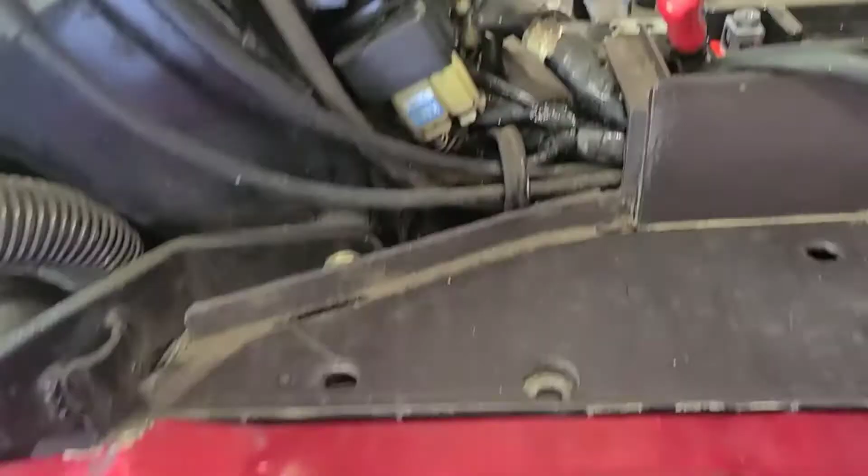I just want you to be safe, folks, because now I'm looking at this wiring and more good news there, I guess. As I gaze, I can already tell there's tape that doesn't belong in there. It's falling apart. We'll look at that in a minute because I can see that's going to be a headache.

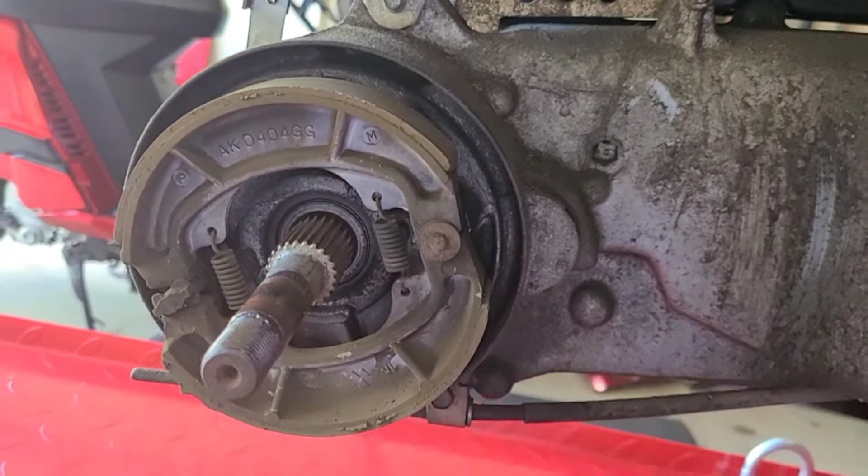But we have the wheel off and we're going to address the brakes next, and also clean under here as well. We got some brand new brakes that we're going to put on. I also had to look at that exhaust gasket - I got to order that as well. And then go back to that mess of wiring.

But these are the brakes I ordered - great sets, original sets, that also come with the springs. So they are OEM, and I like to put back on the bike what was originally on the bike if I can. Once we take a look at these old brakes, you can already see there's brake dust all over them.

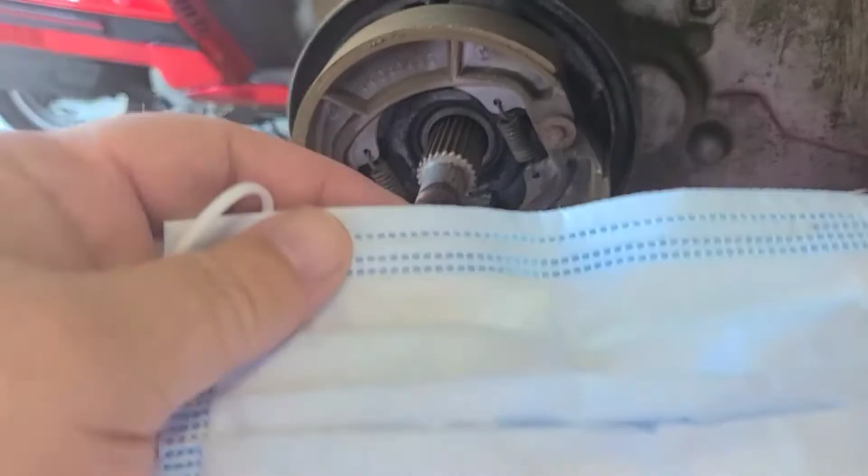You really don't want to disturb any of that brake dust because it can be very harmful to breathe. So make sure the first thing you do is put on some kind of mask - something to protect yourself just until you get all this brake dust under control. Something like this is fine. Just make sure you wear something.

And here you go - got the old set off very simply. And now I will go ahead and clean under here. There's all different kinds of products that you can use.

I just buy the same old stuff - either Brakleen or this Super Tech brake parts cleaner. Spraying it down, just getting rid of all the old nastiness that's in there. Just make sure you put something underneath. I spray it down, clean it up, no worries.

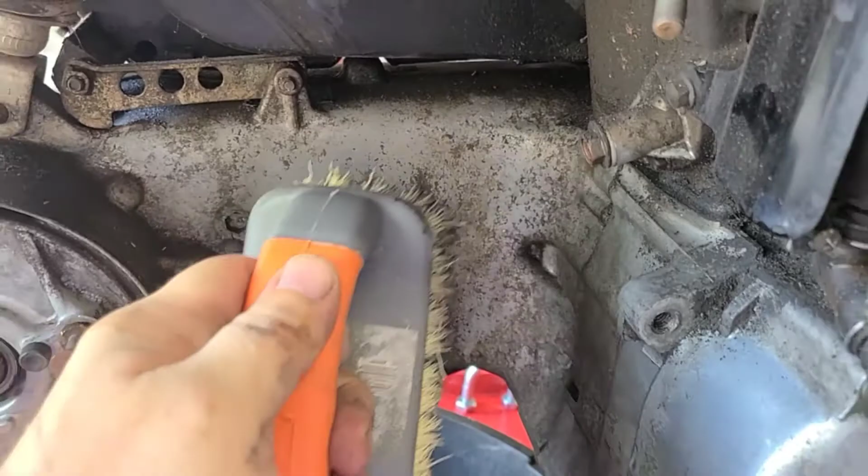Next thing we'll do is start beautifying, trying to clean up all this old muck that's been on the bike for 30 years. It does take a bit of elbow grease in order to get it off.

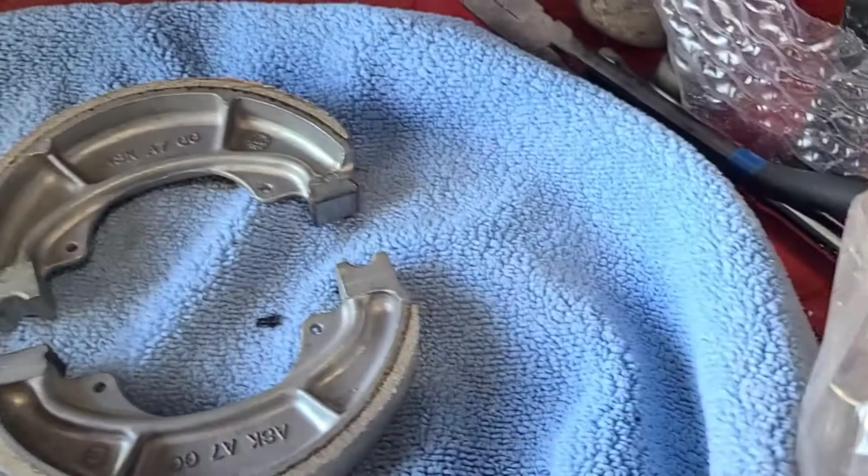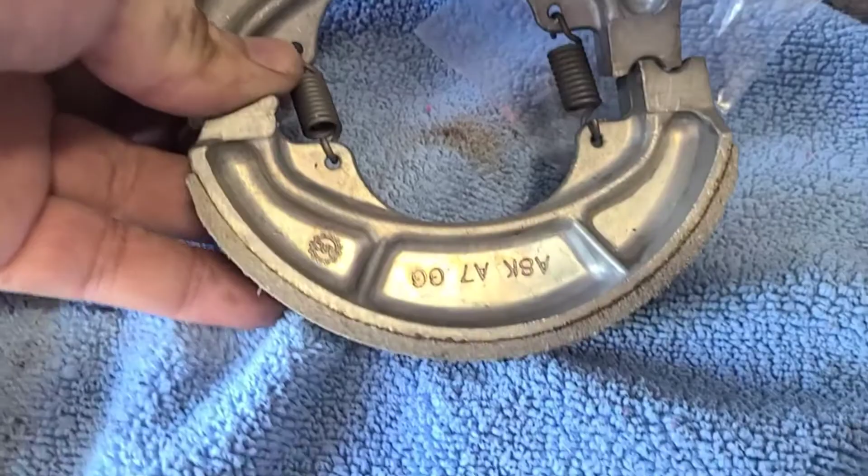Keeping the old pads and springs together, I'll assemble the new ones. Here are the springs, which are identical to the old springs. You can see right away that the new pads are almost twice as thick as the old ones. This is going to help definitely with stopping power, which is much needed. When you go to install the new brakes, put the springs on first - it makes a much easier time of replacing them if they're put together ahead of time.

And there you go, they're very simple to install. The front brakes, same situation, but this time the pads aren't as bad, probably because the front brakes didn't get used as much. But I have an OEM set, and if you can, try to replace the front and back brakes at the same time. It's just so that you know in the future that when you go to replace them again, they're the same age. Otherwise, we'll go ahead and tackle these the same way as we did the back.

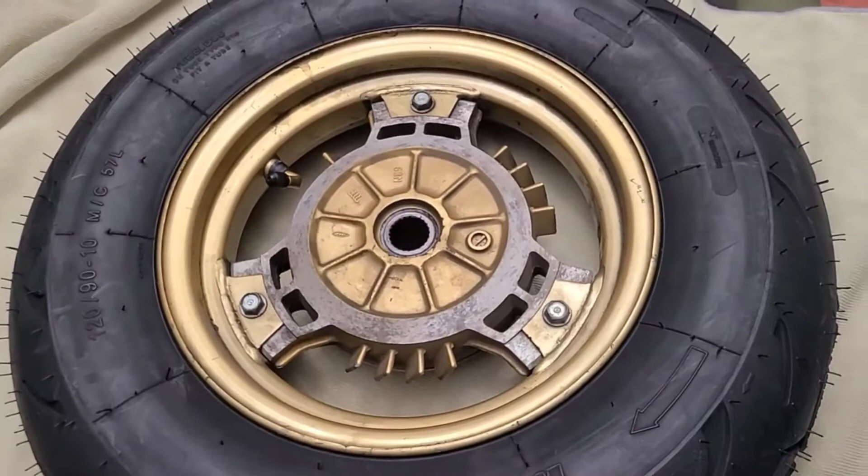Well, I just returned from Honda and they put the tires on for me. This is one of the few things I will not do anymore - I much rather have them do it. They can take them off and on in a very short amount of time. Me using spoons and messing up my arm again, no, not happening. I had an injury on my left arm and I really don't want to aggravate it by putting on some 10-inch tires. It's not exactly easy to do - the smaller the rim, the harder it is. I could get it done, and I have in the past, but I'll let Honda take the credit this time.

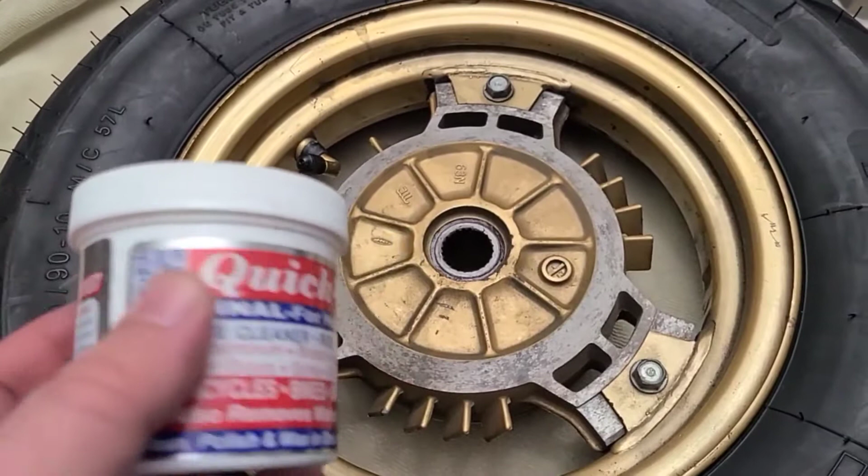But we're going to go ahead and clean the rim up next. I'm going to get out my Quick-Glo cleaner - this stuff works pretty good at removing some of the old rust if I find any. I'll also use some of my orange cleaner, that works really good. There's a little bit of rust, but not much. I think overall these will clean up okay. I guess we'll see - well, what do you think?

I think they came out pretty nice. You got to remember that every little spot is not going to come off. These are 35 years old and the gold overall looks pretty good - they could have been much worse than what they are. Once you put them on, unless you're sitting and staring at them from 5 inches away, they look pretty good.

After about a good 35 minutes of elbow grease trying to get all the old grime off, I think it paid off because, in my opinion, they look gorgeous.

Our next focus is going to be these electrical connections right here in the front of the bike. A lot of the tape is falling off, it's filthy under here. There's some tape that I'm not exactly sure what it's covering, and a lot of it's just moving around - this is just a mess. So I'll go through each connection, clean it up, make sure everything is the way it's supposed to be. Let's see what we find.

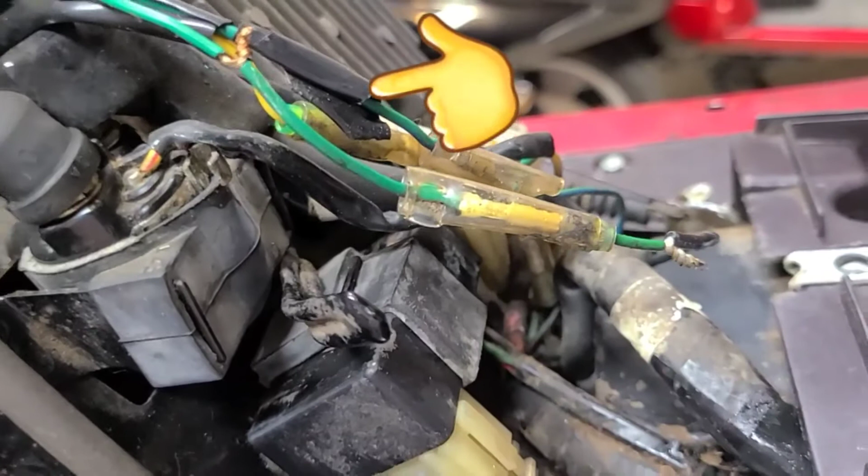And this was exactly what I was hoping I was not going to find - more of these stupid connections. Except these are right next to other ones. Look at the one right to its left, hardly any tape on it. I'm sure that's the same way. This guy was a fool - you shouldn't do this, and if you are going to do it, then you're putting your own life in danger. Each one of these I'll go through and make sure they're all right.

This is one of the reasons why when you ride something for 35 years you'll find anything. There you go, finding stupid stuff like this.

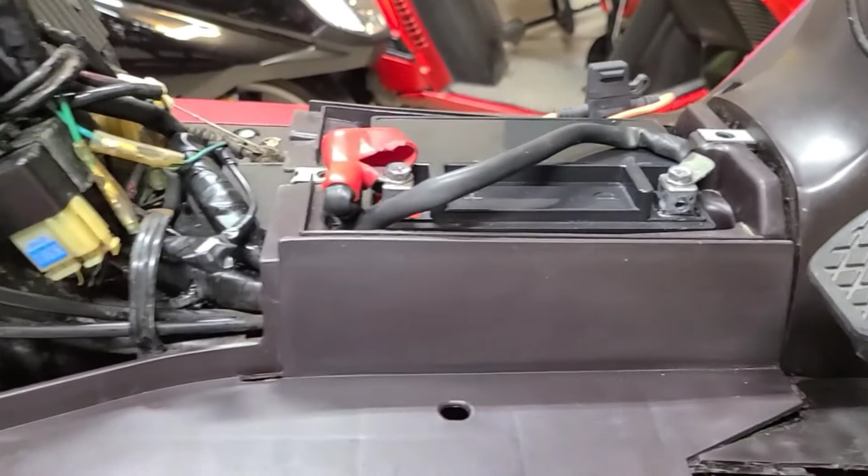Anyways, I'll go ahead and fix all this back to the way it needs to be. After about 45 minutes, I found 3 more that were just like that first set, where they were twisted and covered with some electrical tape, and that was falling off those as well. So I went ahead and fixed all 4. I also went through all of the other connections and made sure they were good. I replaced all the old electrical tape with some new tape, and I also used contact cleaner on each connection just to make sure it was in good shape. And now I think I can ride without worry.

So if you buy one of these bikes, here's something that you definitely should address. At least look it over.

All right, let's switch gears to the other side. We have this airbox/collection type system. It's connected to the carb and wraps around. Very unique, not like any other bike I have. But we'll take the whole thing off and inspect everything with it.

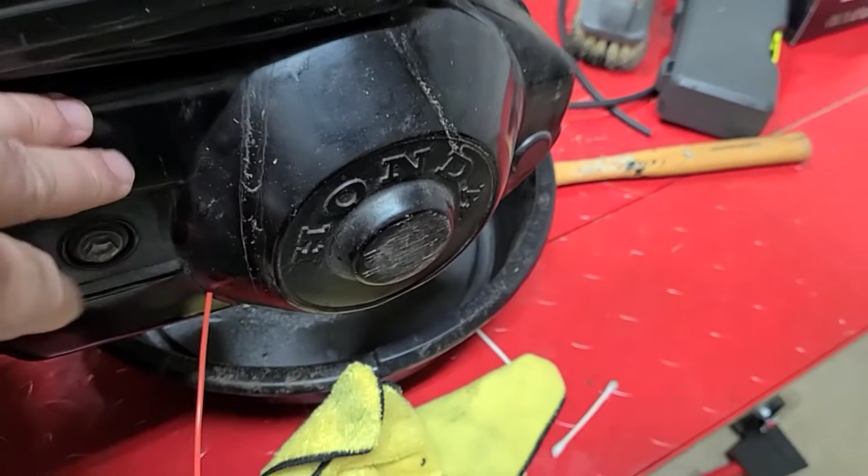We'll also take the front cover off the transmission and take a look inside there. Got some nice rash there. I'll probably end up repainting that flat black just like I did Ruby. I like the look of it, same black that I used on the exhaust.

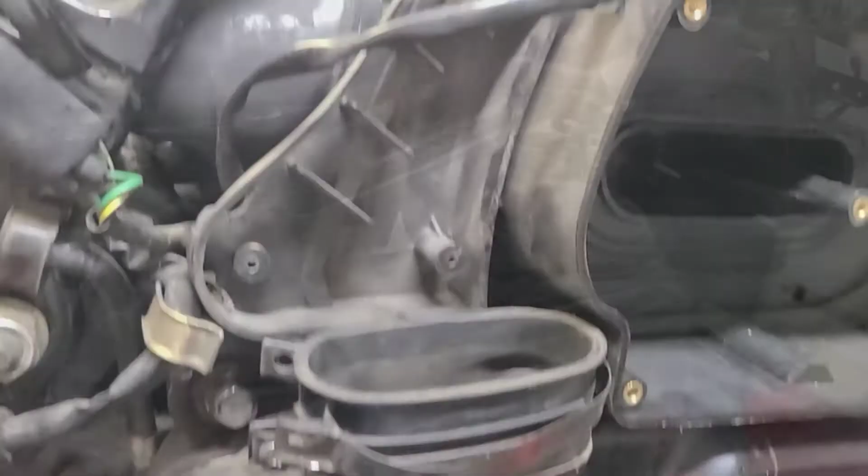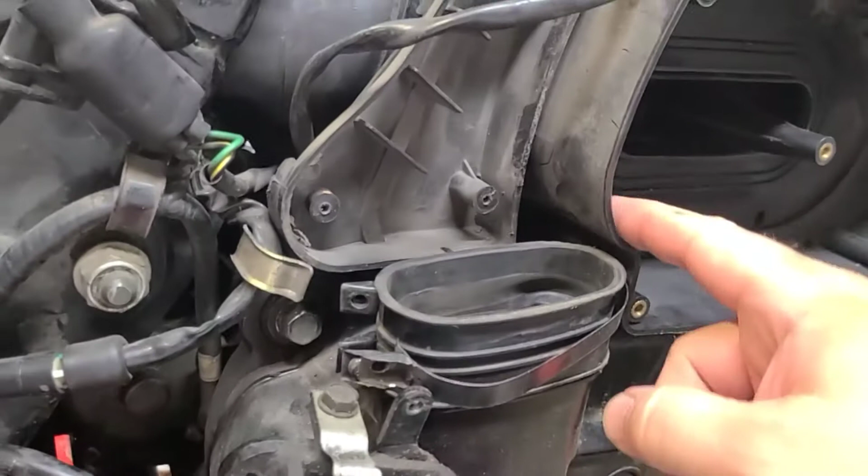But let's go ahead and get started. The first part I took off is called a cover belt case element. I didn't name the part, folks, Honda did. But it has 3 screws and a little band that holds it on, and there's a couple more bolts that I removed as well. You can see one right there and the other one inside.

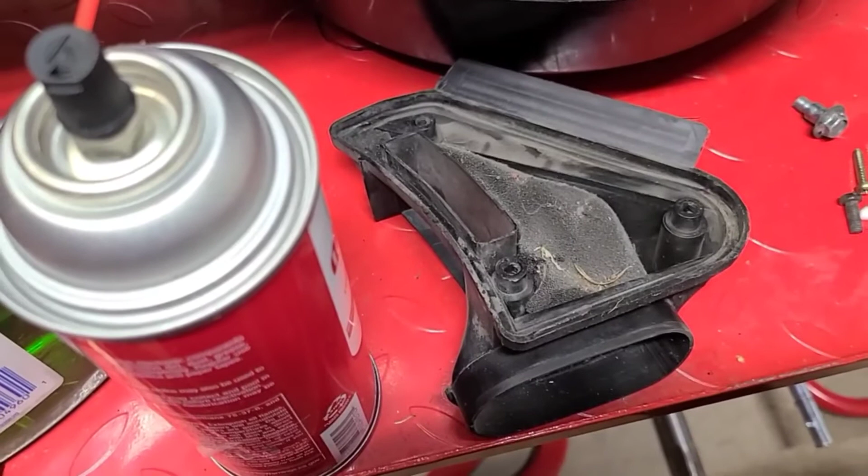And you know, you have the air filter, but I wonder if anybody is going to be alarmed that they didn't know about this. There's an element on the inside of this that's got to be cleaned, and this has obviously never been cleaned. So you take it off, clean it, then add some oil to it and reinstall it.

Well, the beginning, or the front of it, just came off in my hand. This collection box or whatever this thing is called, I'm not sure of the actual name, goes and connects right there to the front of the carb. And from there it goes all the way to the side into the air filter. So it's all connected and starts there. And it wasn't even on tight, it just fell right off. A lot of good the rest of the stuff is going to do if the beginning part's not connected.

Just another aggravation. But you know, that K&N carb that's there, that's not the original carb. Not sure what is wrong with the original, I found it in a box. We might rebuild that and put it back in. Who knows, we'll see what happens with this one. But the beginning is out, let's continue to pull the rest of this out of here.

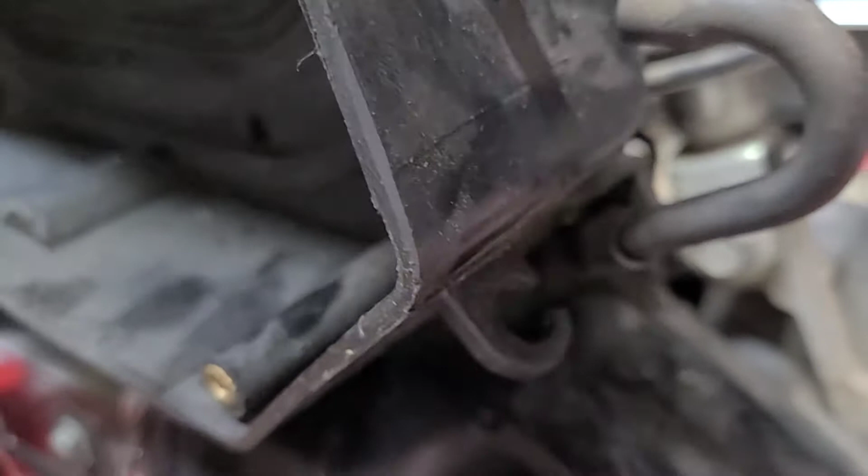And I'm trying to point out here some of the things that I encountered. This particular connection, don't forget about it, otherwise it didn't want to come off. I looked over that parts fiche and found all these different things. For this one I used some curved needle nose pliers and was able to get that off. But be careful, you didn't want to pull too hard on that and have it come off the other side. And there you go, probably the first time this has ever been off the bike.

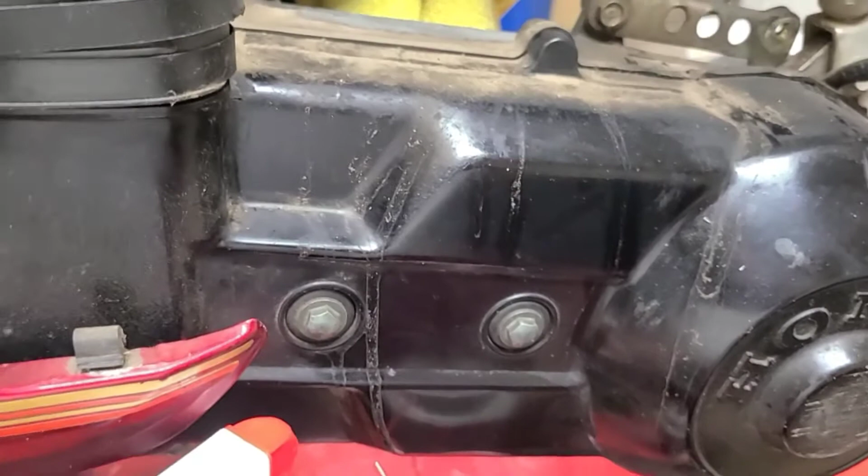I wouldn't doubt it, and we've got some cleaning to do. We've got our spark plug visible, of course that's going to be coming up soon. And we'll look everything over under here just so I take care of it now before I put that box back on.

Now you can see this is as far as I could wipe. Before, all this was on top here and I couldn't get to any of these areas. I tried to get it cleaned up, but now it'll be much easier for me to get a rag around in here.

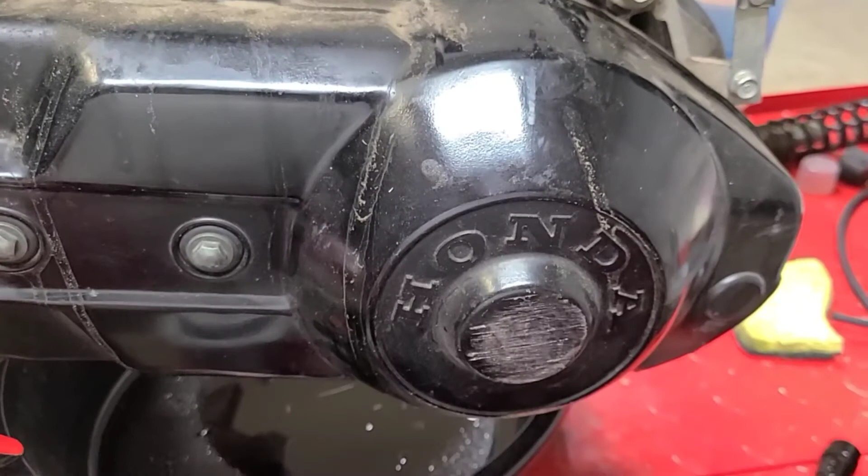We're going to take care of that spark plug next and clean around that. Let's hope it's at least the right plug. I've had some experiences in the past where I find the wrong part number plug. And we're also going to take a look at the shock. I've got to take this side off, which has not been removed, and get those all put in place. That's all coming up soon.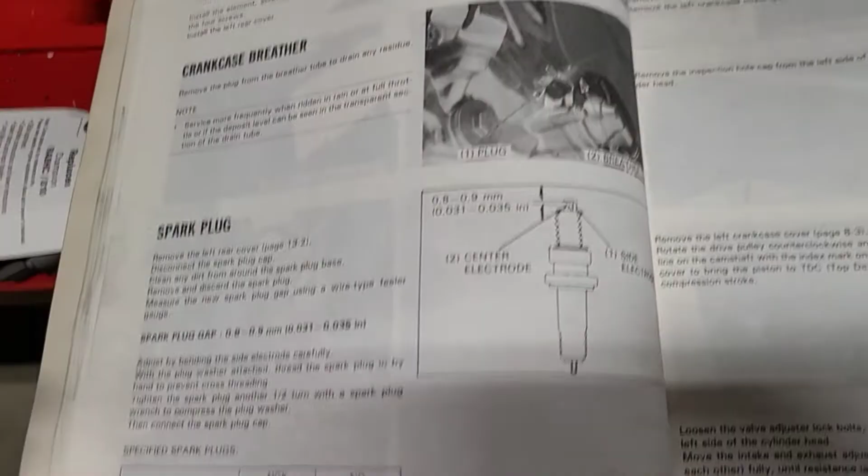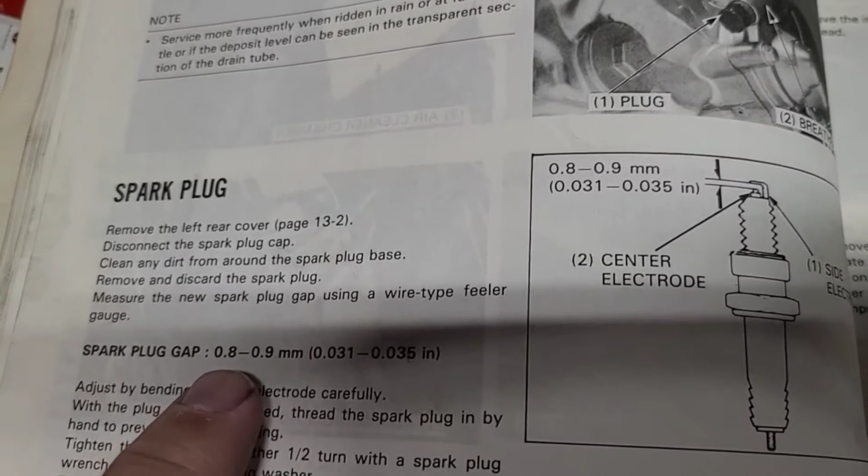Onto the spark plug. You can see the one that I bought is at the very bottom, and it says for extended high-speed riding. It's probably the hottest plug and most performance. This is the gap, so we'll go ahead and gap the new plug. But first, let's get the old one out.

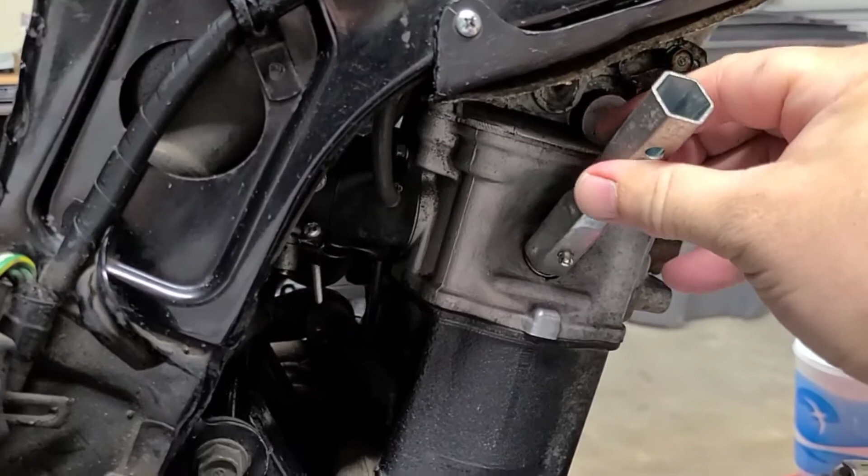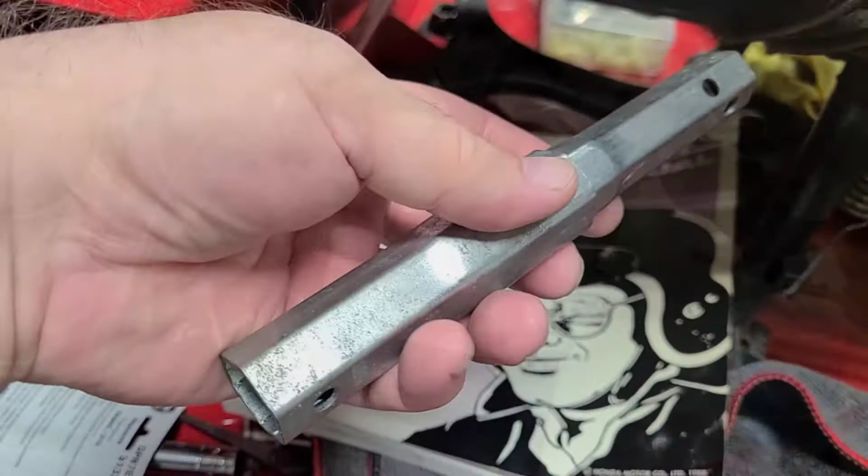Sticking the tool on the plug, just use a screwdriver, and with very little force, this one's actually tighter than it needed to be, but the old plug will come off. This is a universal spark plug tool, get one, folks. And this is the plug that came out of the bike, which was in pretty good shape actually, but it's a 6EA9, and it is the standard plug.

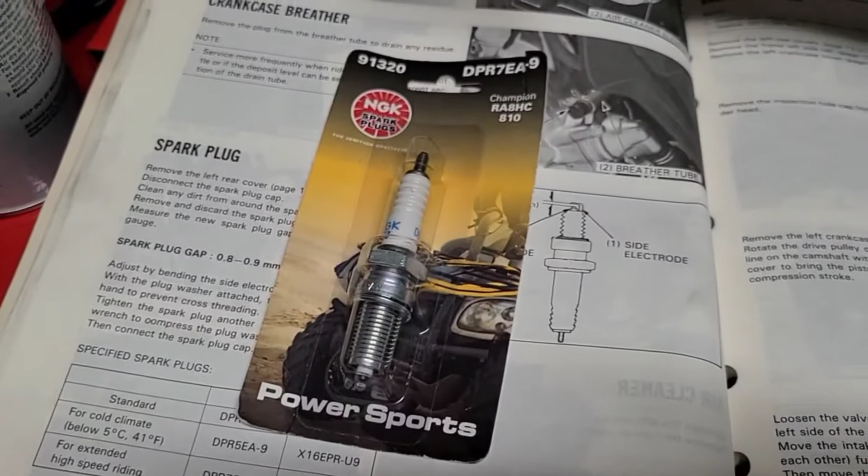So at least we had the right plug in there originally. And here's the plug I purchased, the 7EA9 version. Make sure you use your gapping tool. In the service manual, it tells you exactly what the gapping needs to be. Gently turn the spark plug until it's tight, and then with very little force, lightly tighten it. That is all you need to do. Do not over tighten your spark plug. Lightly tight is all you need.

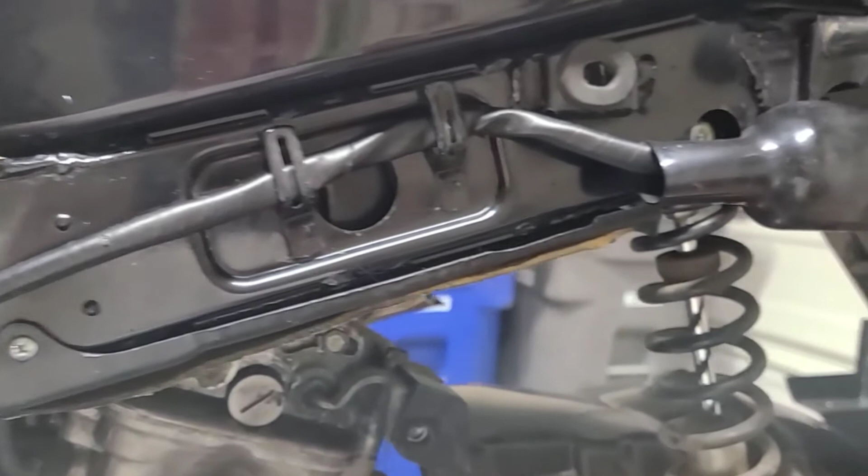Next we'll go ahead and check and clean the connections on the ignition coil, just so we know we're getting optimal performance out of it. After I went through the coil, I went ahead and went through each one of these other wires as well, going through each connection and cleaning it with contact cleaner, checking this side for the work I did earlier just to make sure I didn't miss anything, and then went back along every connection checking my tape, making sure everything was tight, and no worries there.

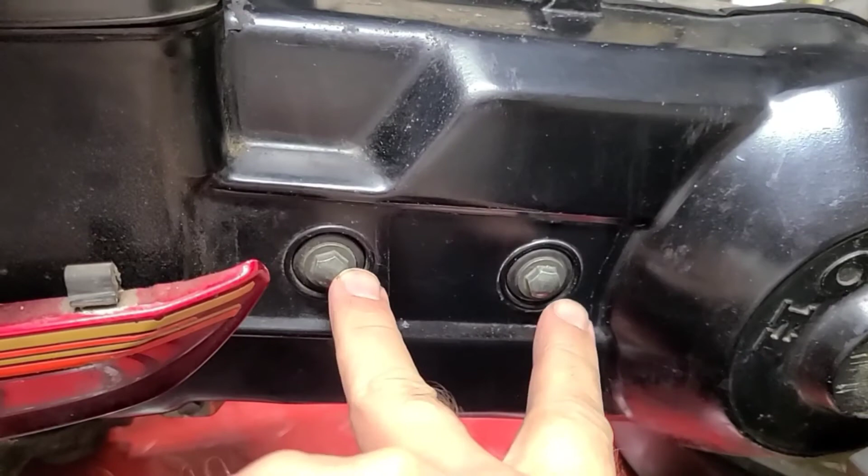Next is our transmission case. Been looking forward to that. Start with those two bolts there. Before we do though, let's remove this floorboard. It'll give us much easier passage into that transmission.

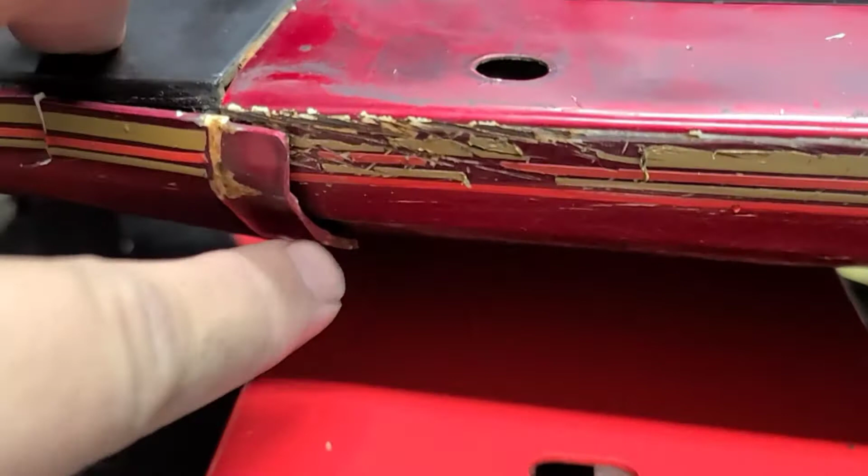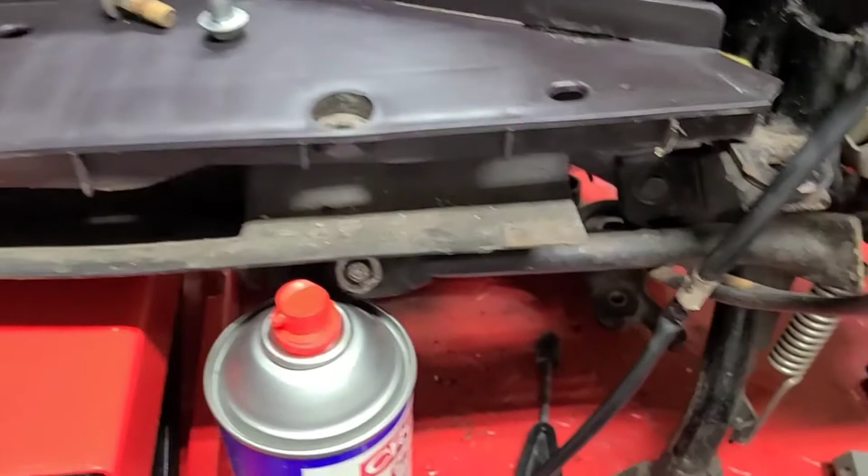Look at this though, what an idiot, couldn't even put it back on the right way. It's quite obvious that it's not on right, and he just left it like that. Anyways, with it out of the way, it's going to definitely help us. Hopefully I won't have to remove much more in order to get that case off. I think I should be good though. I guess we'll find out.

And off with the transmission cover we are. Looking under here, it looks too clean, folks. This looks way too clean, not a whole lot of dust under here. Somebody's replaced this belt, I'm willing to bet this isn't original. I'm going to measure this up and see. But you know, there's not a whole lot of dust under here like I would have thought there would have been. This belt doesn't look to be in that great a shape, but it doesn't matter.

I've got a whole new clutch assembly. But I bet you the clutch weights are all worn down anyways. We'll find that out. We'll compare them to the brand new ones I have.

We also bet that nobody's been in that variator. I can't wait to find out though. We got to remove these two nuts, and then we can see all the fun underneath.

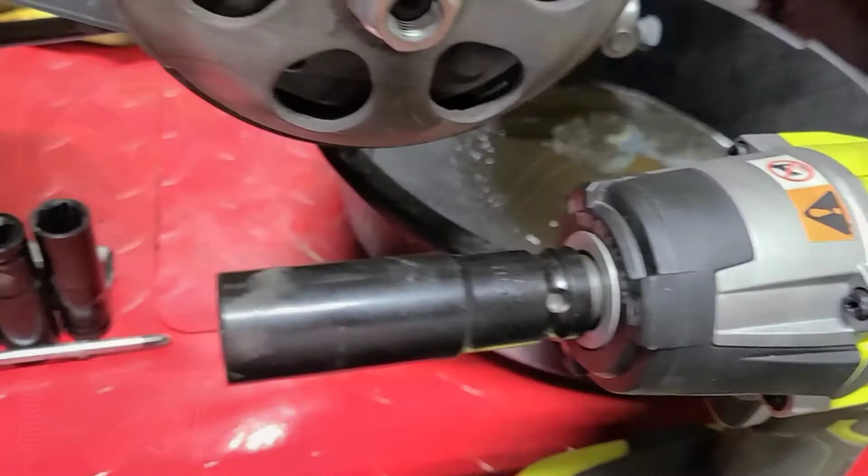Using my trusty impact wrench, I've loosened this nut on the left side. Just be sure not to lose that washer, because that's what's next. This thing with fins on it, just so you know, is called a drive face - that's the proper Honda term. Once you remove that, you'll right away see the belt is sitting on the drive boss. When you reinstall the new belt, make sure it's sitting on there like this, otherwise you'll have problems putting that drive face back on.

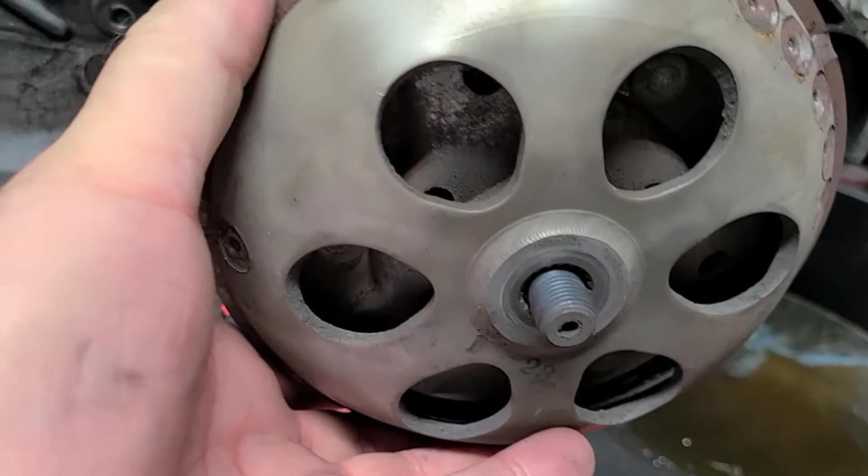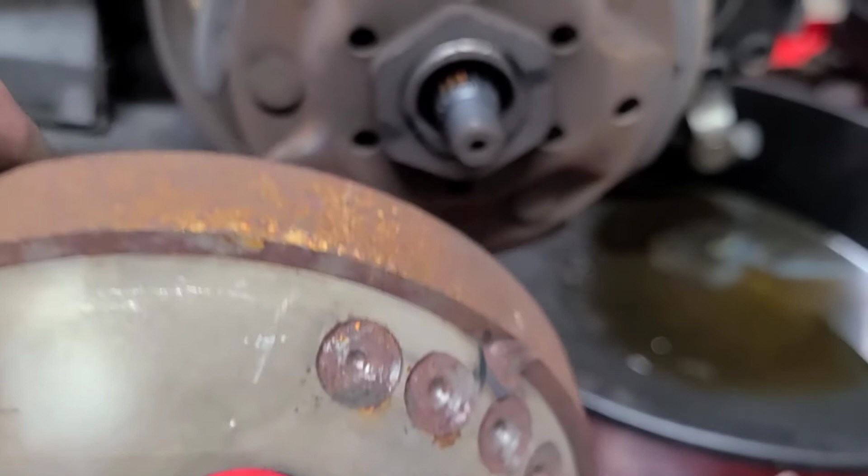Now let's go ahead and remove the nut that is right there on the front of the clutch. Once we take this off, it will allow us to remove the bell, which has got some rust on it, and it's also probably going to have some dust on the inside. So just be ready when you pull this off to do it very gently, so as not to disturb any of that old dust sitting in there. Usually that dust makes it throughout the whole transmission. That's why I think this has been cleaned somewhere in its past, probably when that belt was replaced.

I'll take that belt and put it next to my new one and just see if there's a thickness difference. I've got a feeling it's pretty new.

Look at the weights, that's what's right here. These weights are what expand in and out, and they have these little pads on them. Those pads hit the bell, and that's what allows the bike to move. They are extremely worn. So if you ask the question, should you replace those at 11,000 miles, the answer is yes, because you can see these are definitely past the service limit.

Now that we have the clutch off, we'll do a little bit of cleaning underneath here. It's not too bad though. I like this little thing here - it connects up to a vent and brings some air in from the bottom.

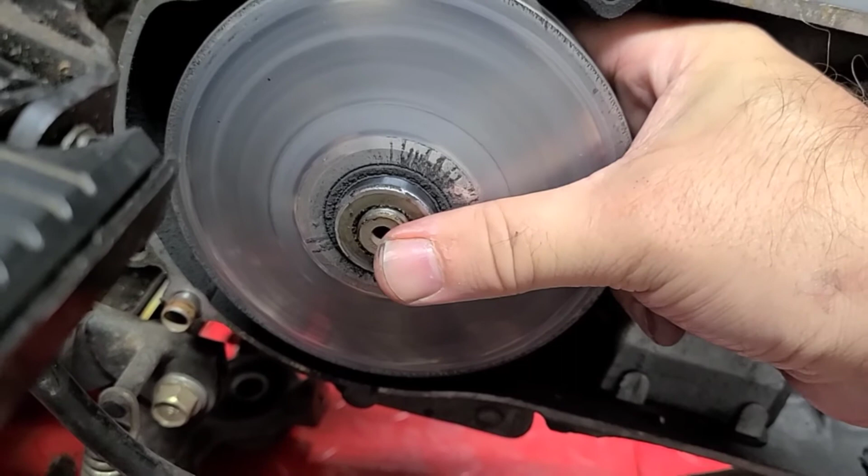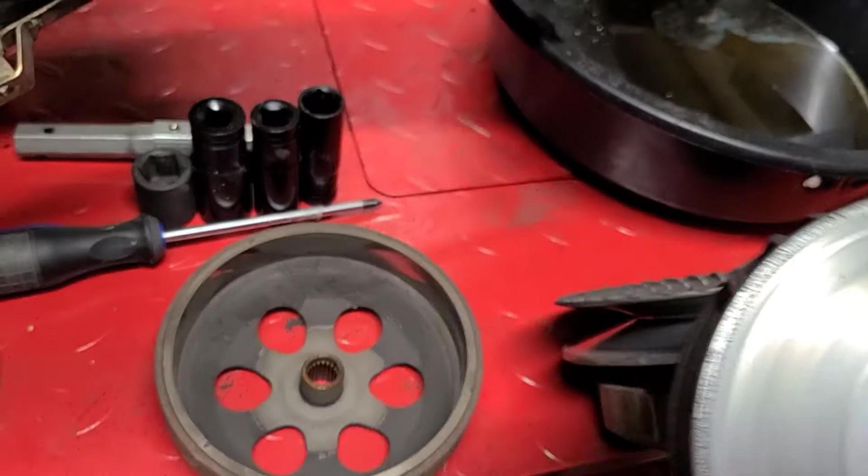But what's interesting is what is right there. You see that going around the variator at the bottom? That's not supposed to be there - that is grease. And that tells me there's still grease inside of this, because that's what ends up happening: grease comes out, and when it does, it makes the worst mess.

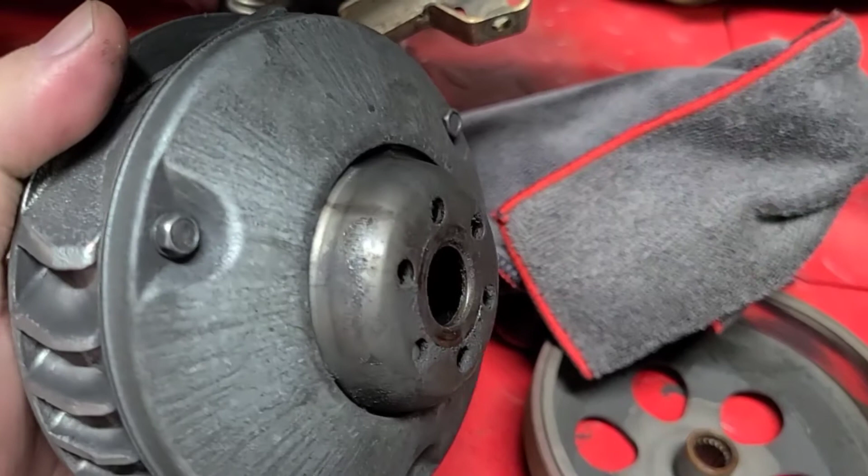Now we'll go ahead and take the boss off, and then we'll take a look at the back. I went ahead and removed the drive boss out of the center - what can we see inside on this?

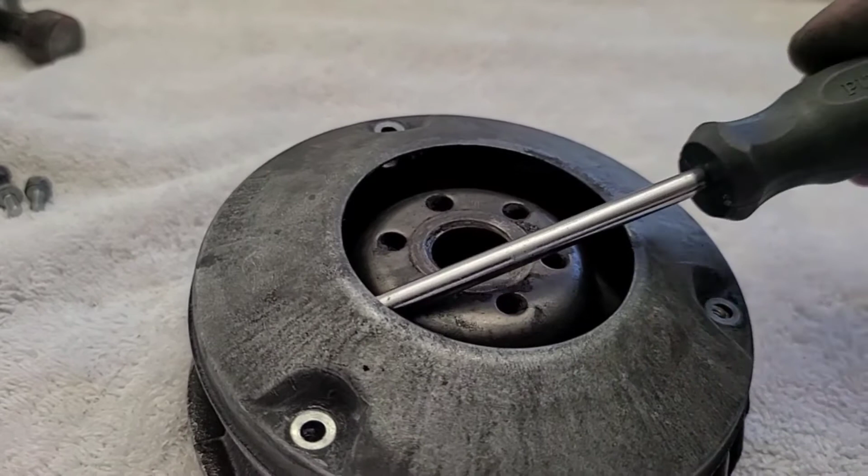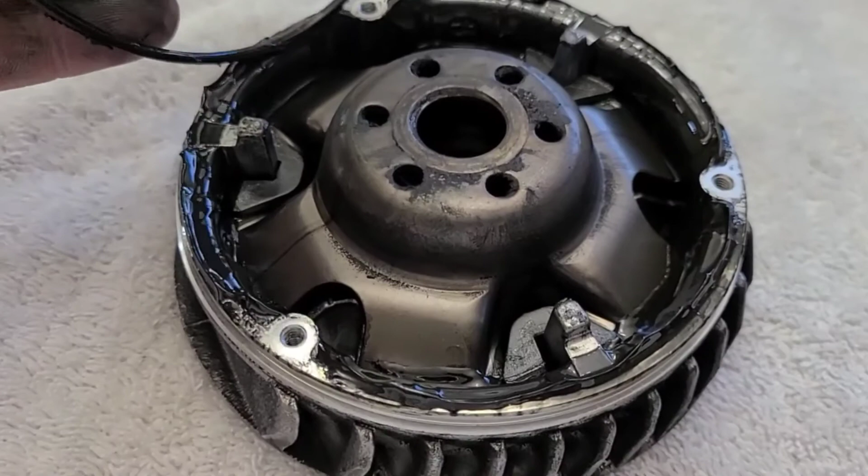By using this screwdriver, I'm going to go ahead and remove this grease plate. I've already taken off the three bolts that held it on. My hands are already filthy because look at all the grease inside. You know, back in the 80s, Honda and other manufacturers thought it was a good idea to use this grease, and what they thought it would do is help the rollers move.

Every time this ram plate would go up and down, the rollers would move - this is the ram plate I'm talking about. But because there was so much grease, it actually caused the rollers to just stay in place, and that's why you get these flat spots. Right away looking in here, do you see any with flat spots? I can tell right there at our 7 o'clock - big old flat spot right there on the top of that roller. It's extremely clear to see. I'm sure some of these other rollers are also going to have flat spots once we remove them, but this one's actually cracked quite a bit. This one on the top, no, these you really can't tell.

It's kind of hard to tell. Once we take them out, we'll get a better look.

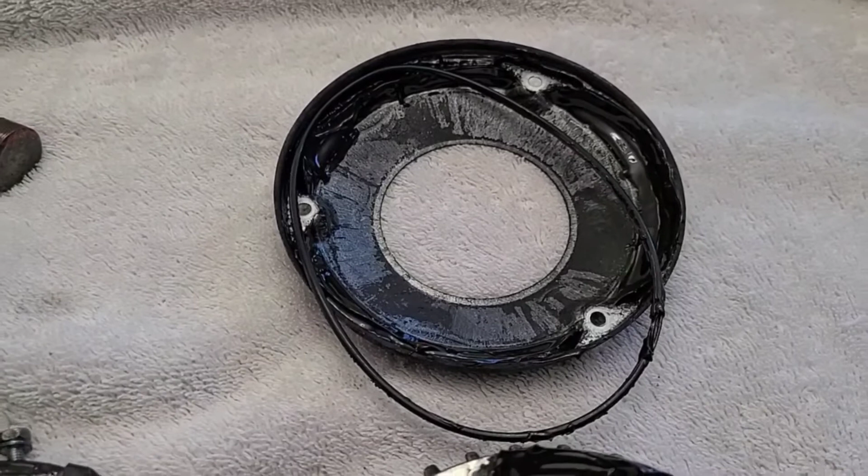Something else I wanted to mention, that grease plate that I removed - you do not need to put that back on. It has no meaning for the bike, it doesn't do anything. It is something that held the grease in place. It's not needed any longer. Throw it in the trash.

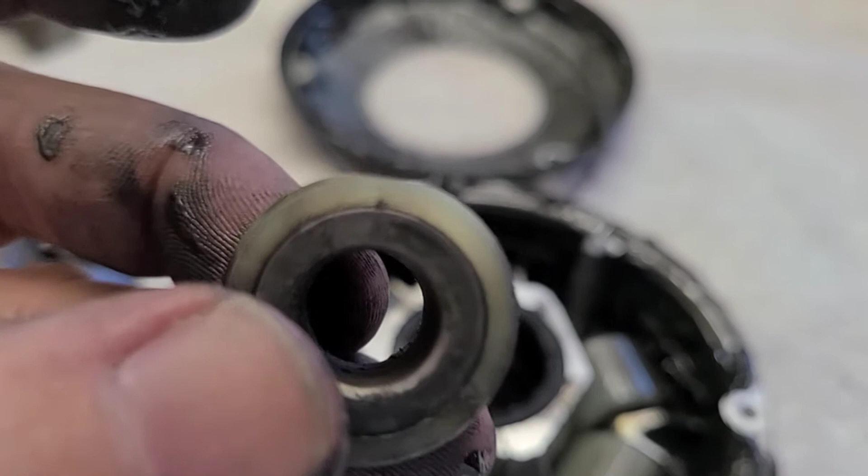And there you go - take out the grease, no graphite. That's what I said, no graphite, no lubricant, no nothing. You remove every bit of the grease out of this and you never put it back in. These rollers, you do not clean them up and put them back in. You throw them away and buy a replacement set. You get rid of that grease plate that is at the top of our screen - that goes in the garbage. It has no use other than keeping the grease in the variator, and there is no more grease.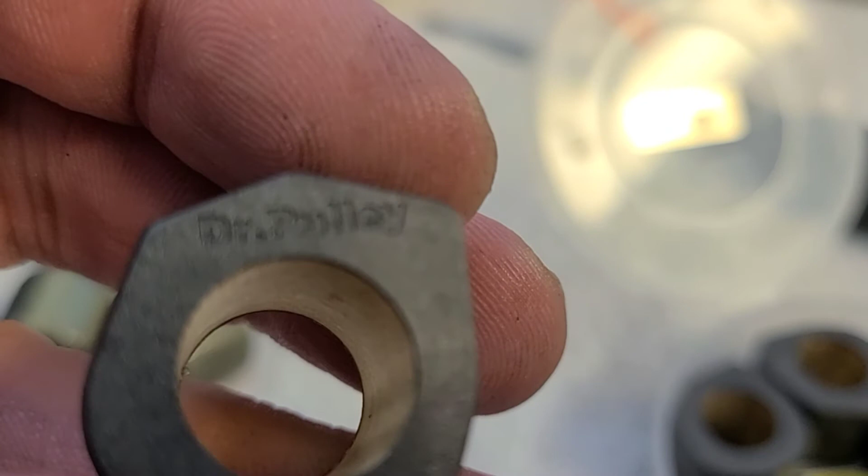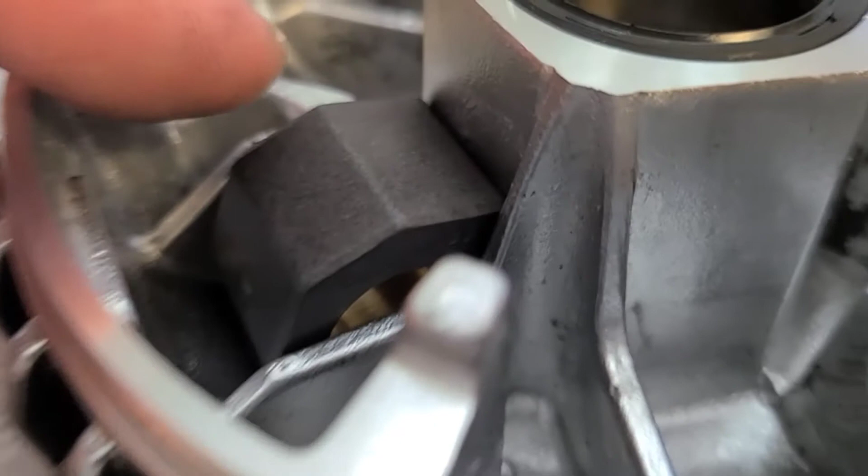And here's one of my peak performance options I'm adding in, their Dr. Pulley sliders. Now why are they called a slider? They're not fully circular - you can see how one end is long and flat. When you go to install these, you always want to make sure you can see Dr. Pulley on the top. If you can't, and it's not written straight across the top like right here once I pull it out, that way you know it's in right. And as you can see, the slider, when it works, it goes like this - that's why it's called a slider and not a roller.

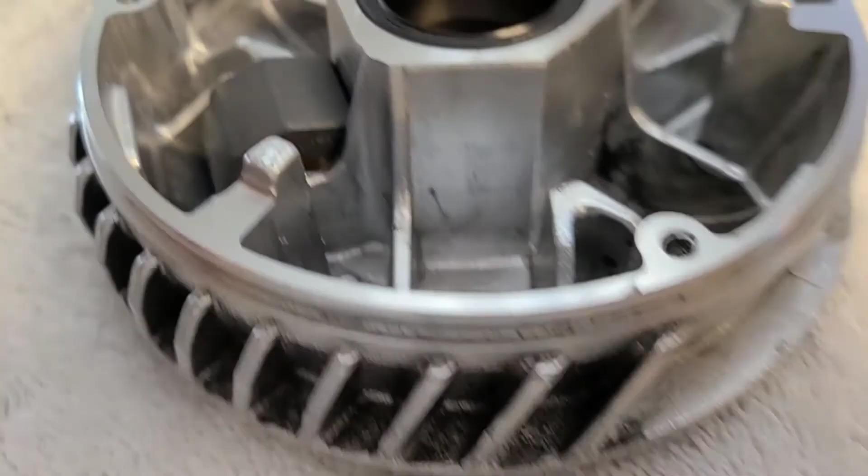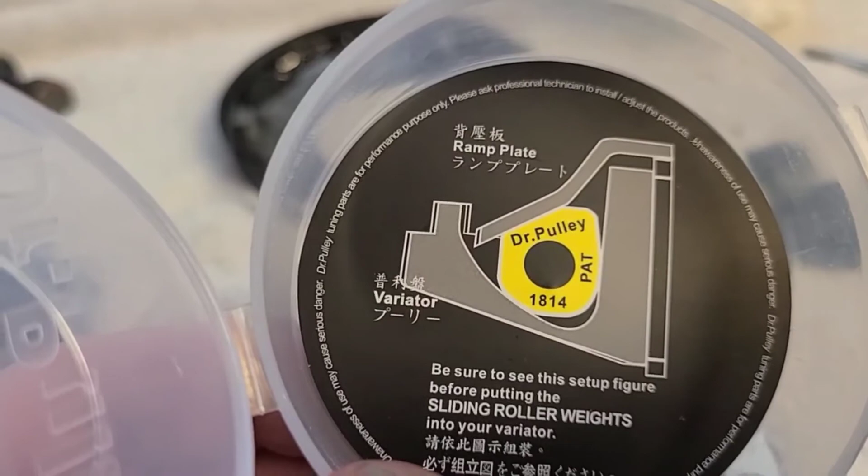And this is definitely an upgrade to what was in the bike. You can see all the grease is no longer there - I got it all out. There might be a tiny spot here and there, but no worries. And here's how it looks after you install them all. It shows you right here in the directions that you should be able to read the Dr. Pulley name. And if you can't, you got them in wrong. So follow the directions, folks, and it will look just like that. It's kind of hard for me to zoom it in, but you can see Dr. Pulley written straight across.

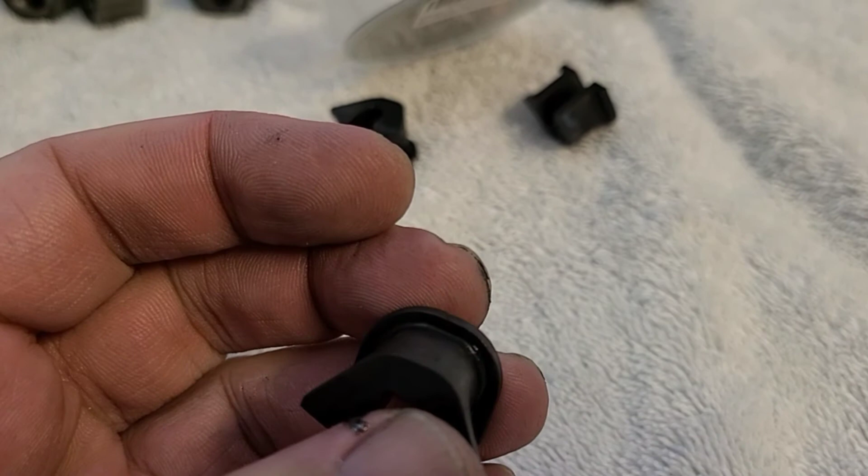All right, let's move on to the ramp plate next. I'm going through all the stuff just so you're aware - if you are familiar with this, that's great, if not then hopefully showing you all this is helpful. But anyway, you see the rounded part at the bottom? That is the slide bottom portion. Just lay them all on the floor like this so that you don't put the slides on upside down, because if you do, it's not going to allow your ramp plate to move freely in and out of the variator. You can see here I've cleaned it all up, so when you go to reinstall these, just make sure that rounded part is on the bottom.

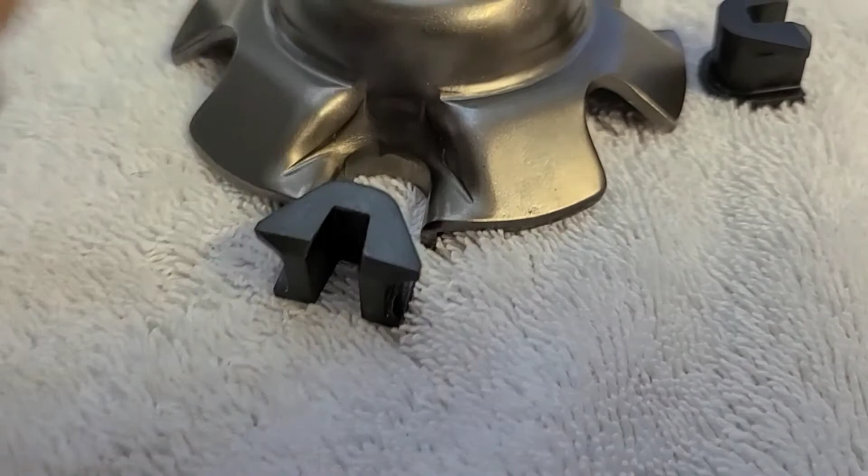And that's where we're going to stop volume 2. Volume 3 will continue on with the transmission. You can see I've actually painted the cover in flat black - I like the way it looks in flat. Anyways, we will have volume 3 probably sometime in the very near future, hopefully.